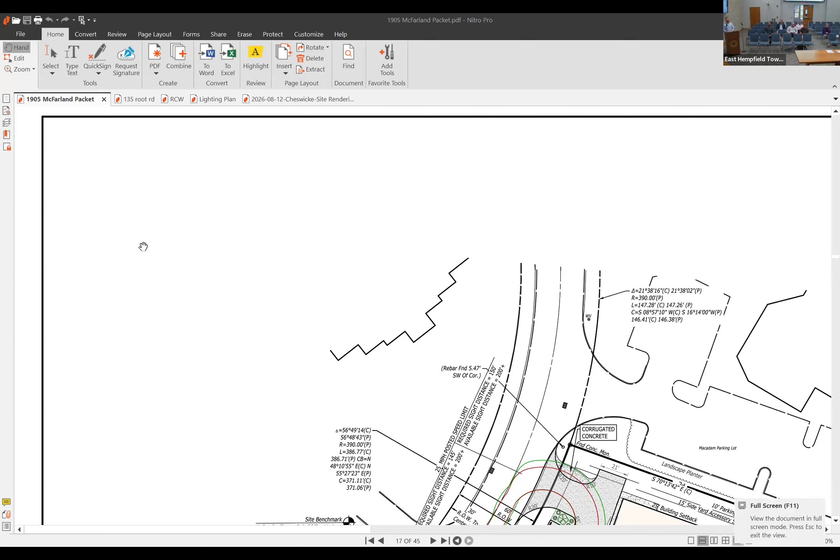Good evening, my name is Chris Monahan. I'm with Mack Engineering, here representing the applicant on 1905 McFarland Drive. The project is on a 6-acre lot just east of here on McFarland Drive. It's within the Enterprise Zoning District and has a Greenway Overlay District as well. The plan, it's a final plan, proposes construction of almost a 62,000 square foot facility to be used as general industrial. The lot's serviced by public sewer and water.

We did receive capacity approval letters last month from both of those authorities, so we're in a good stance there. We have gone through 3 reviews with DMA so far, and the last review that we got last week is fairly straightforward. Most, if not all, the items we will comply with.

A few of the major items left is the NPDES permit. We've reached administrative completeness on that, and we're still waiting on our technical review comments from the Conservation District. The other item is the traffic impact study. The applicant is contracted with TPD to get that completed.

So with that, we do have a handful of waivers and modifications we would like to request in this project. If you'd like, I can run through those right now. Yes, typically we would like you to go through them one at a time, and if any of us have questions, we'll ask them before you move to the next one.

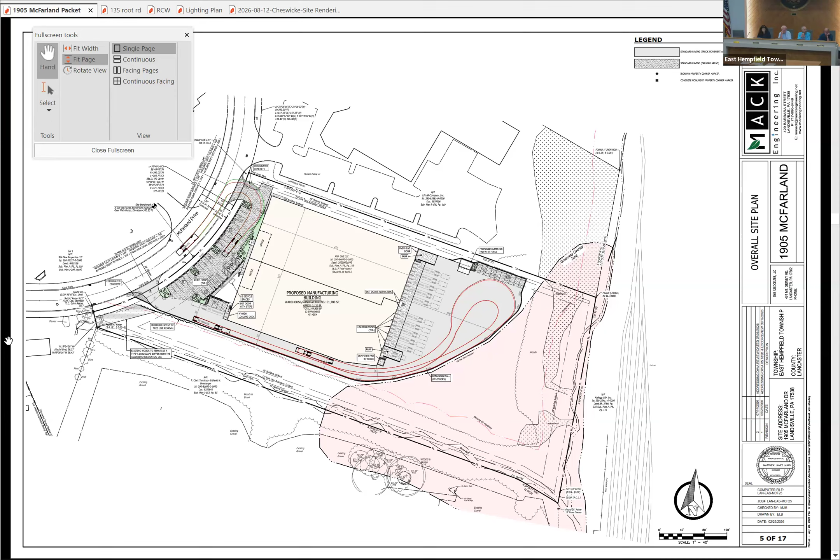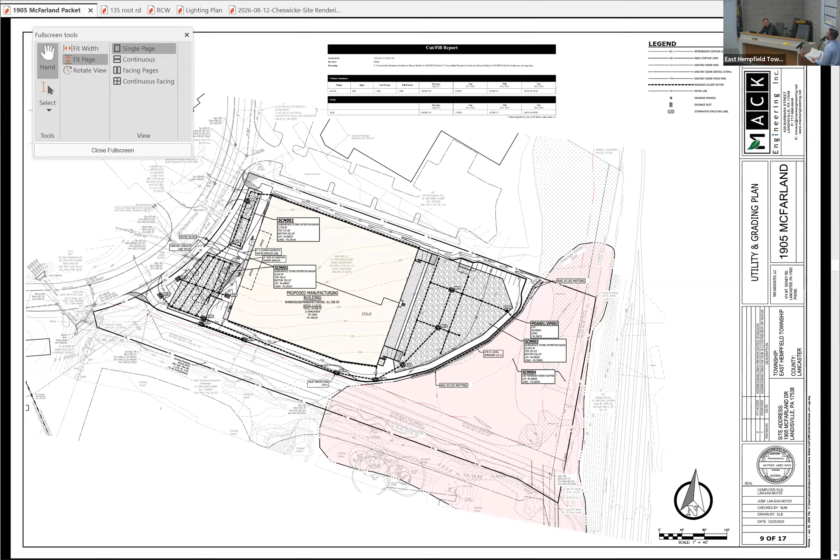Could we pull that up to the right plot plan here? You can see the... take it a moment to catch up. What page is he on? That's the correct sheet, jump to it. Don't look like it, that's the front of the building. Page Josh, 21. 21.

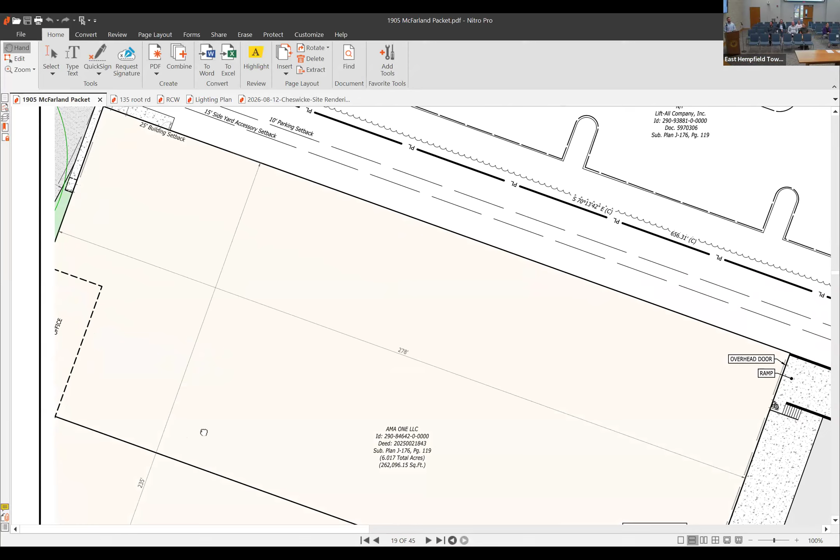No, we're fairly, I mean, we don't want to have the trench any closer to the building than it is. But I do see your concern over the landscaping, and the inlets on top of the sewers probably can't happen either.

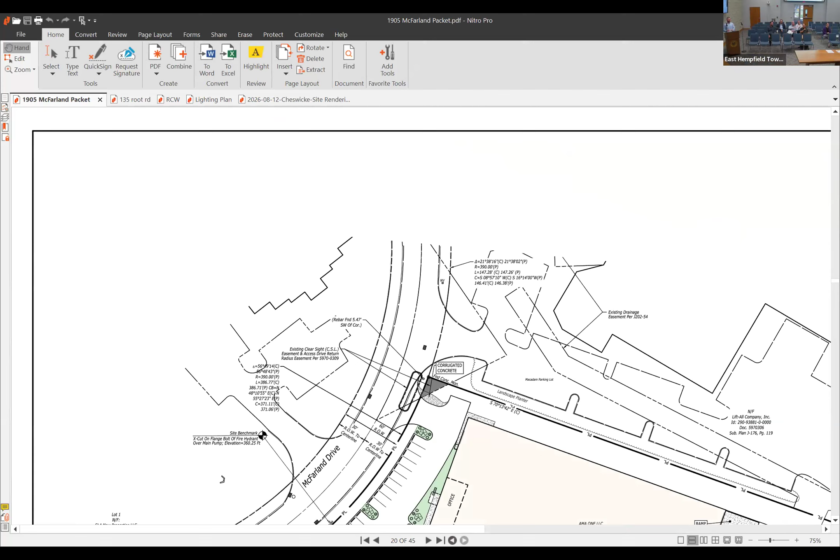Well, we can revisit that with LASA and see what they would allow, and if it constitutes a waiver request. If we can't meet the interior landscape requirement, we'll probably have to return and request a waiver for that. Okay, thank you for the comments there.

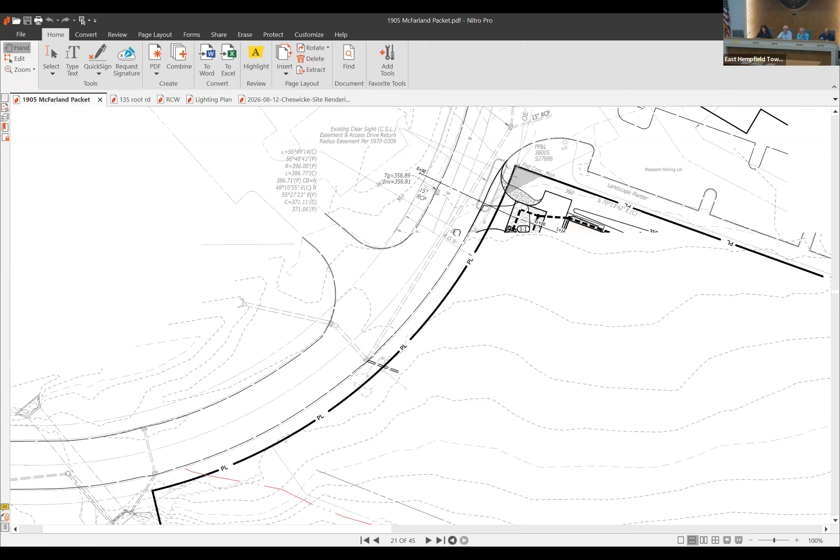Is there anything else on that one? Okay, the next one is just the minimum 150-foot driveway separation, just due to the layout of the existing cul-de-sac, McFarland Drive, and the existing businesses and residents around there. We physically can't meet the turning radius requirement and the 150-foot driveway separation, so we're asking for a modification for that one.

Scott's there, make sure I didn't jump ahead. Oh no, we're good, number six. Number six, yep. So we're requesting a modification to 85 feet, 94 feet, 135 feet instead of the 150 feet. No questions on that one.

The next one was the deferment, so just deferring the roadway widening, sidewalk, curb, and grass strip. We're happy to do that if the Board of Supervisors with the township ultimately requires that in the future, but right now we'd like to defer it.

Just a question again about how this compares to neighboring sites. There's a comment in here that says currently McFarland Drive is classified as a local road, which requires a 50-foot right-of-way, 26-foot cartway. The applicant has made a request that McFarland be classified as a collector road, which requires a 60-foot right-of-way, 30-foot cartway, and so forth.

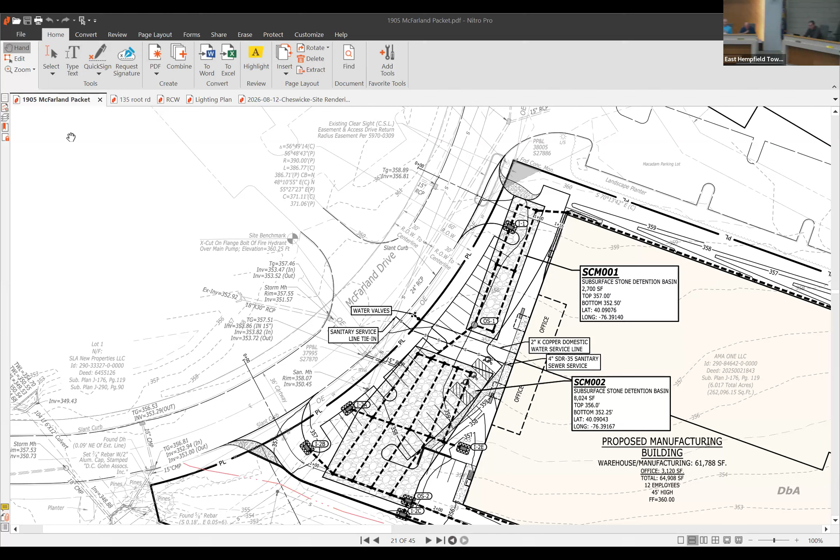Um, next one is 135 Root Road. Oh, okay, you're not sitting down, huh? Yep, so would you like me to start? Sorry, I didn't mean to jump ahead on you. Go ahead, no please. We're just gonna pull up the plan, but go ahead.

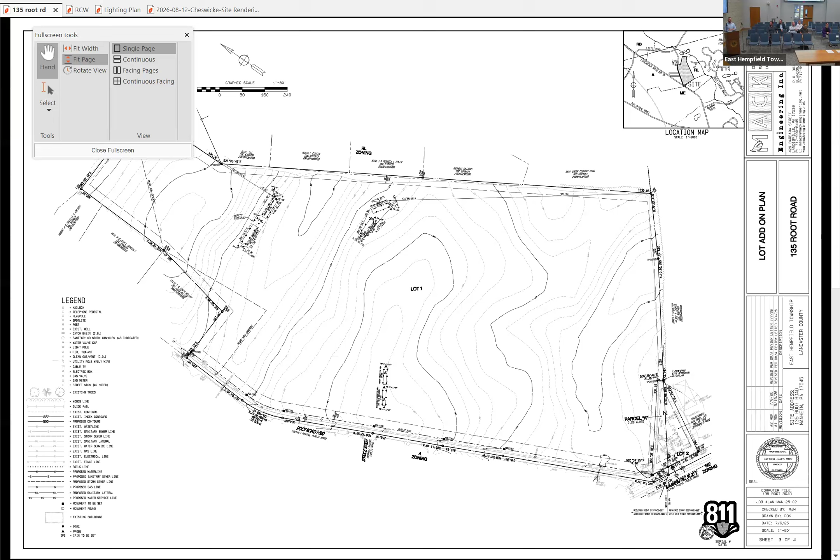Yep, the next one is just a minor plan. It's adjusting a lot line between two existing lots. There's no development, no earth disturbance, no change of use or anything. The larger plot that you see up there is a vacant lot that's just used for agriculture right now. The one in the bottom right corner of that sheet is an existing lot. It's got some encroachment on this larger lot, and that's ultimately why we're here tonight to request approval or recommendation of approval on this plan.

It lies within the agricultural zoning district. We've gone through 3 reviews so far with DMA, and the comments are very minor. Really nothing else to address on the plan itself. We do request one waiver on this one, and it's just to show the plan scale. We believe that this plan scale really represents everything for what we're trying to accomplish for this plan. And I believe Scott recommended approval on that one, recommended be granted.

There were a total of 4 modifications, a couple more waivers on here that I forgot. The other one is, would you like me to jump in the waivers? Please. The second waiver is the same one we mentioned before about the survey.

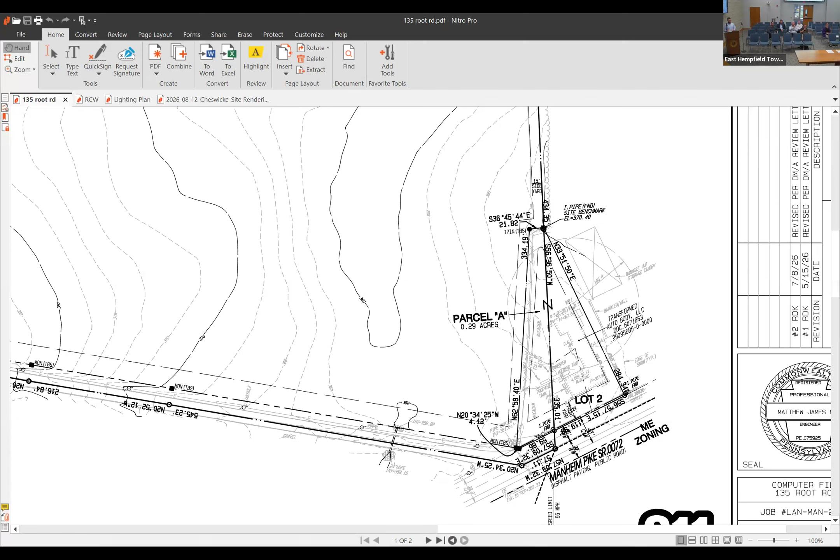We provided aerial imagery, and that seemed to satisfy Scott's comment on that one. It's included, it's the 4th sheet in the plan. I think it's the 4th sheet or the 2nd sheet. Yeah.

Third waiver is the frontage improvements. Yes, we created a deferral exhibit, and Scott appeared to review that and recommended that would be granted as well. So there's 2 exhibits that we prepared, one for along Root Road and then one for along Manheim Pike. One is a PennDOT road, so that'll be subject to PennDOT approval when it comes time to make those improvements. And then Root Road is another one that we're deferring.

So three waiver requests, or 2 waiver requests and 1 deferral, and a subdivision worth mentioning. We'll comply. Last one, number 4, just proving that there's a visible house or street address number on the facility, and we've provided that to Scott. It just didn't make it in the letter. Okay, so that's all I have for that one. Happy to answer questions you may have.

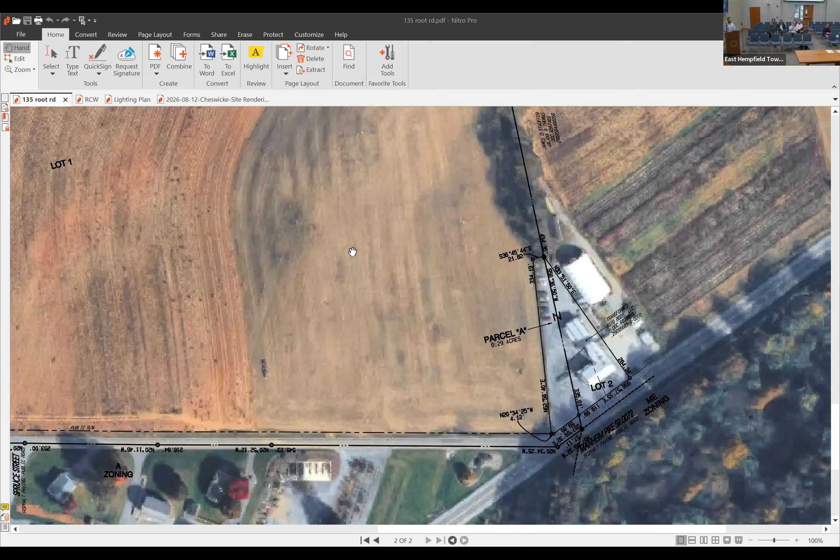Did you cover the wetlands report? Oh yes, Scott reviewed that, and we just had to have somebody sign it. Wayne Bowen in our office, he's done those for us and he signed it, and I'll provide that in the next submission. Thank you.

Does anybody in the audience have any input on this plan? No one on Zoom. Okay, then we're ready to move on with the waivers and modifications.

Mr. Chairman, I'll make a motion to recommend approval of requests 1 and 2 and conditional approval of 3 and 4 for the 135 Root Road Lot Add-on Plan, Township File 2608.01, subject to staff and engineering comments. Second.

Okay, we have a motion by Mr. Boltby, seconded by Mrs. Reidenbaugh, that we recommend approval of modification requests number 1 and 2 and conditional approval of modification requests 3 and 4 for the 135 Root Road Lot add-on plan, subject to staff and engineer comments. All those in favor signify by saying aye. Aye. All those opposed? Okay, that would be unanimous.

And then the plan itself, we need a motion. Mr. Chairman, I'll make a motion to recommend approval of the 135 Root Road Lot Add-on Plan, subject to staff and engineering comments. I'll second that.

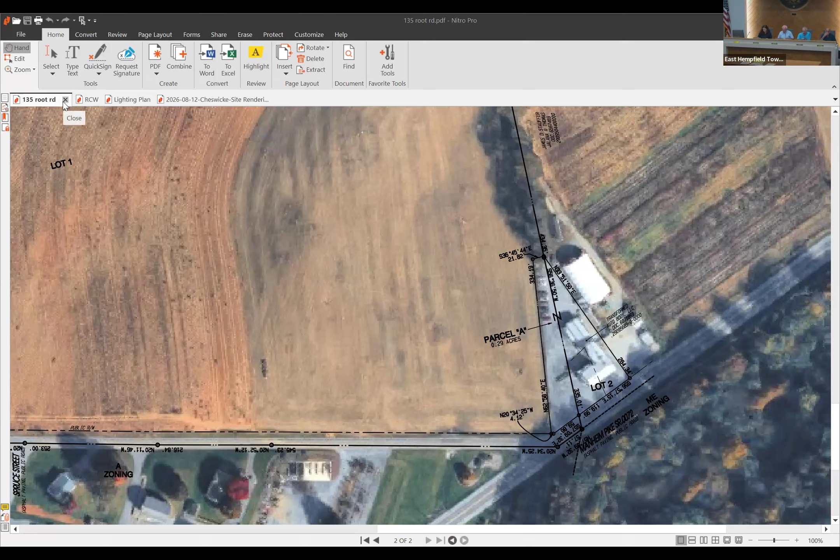All right, number 3 is RCW Racket Club West Athletic Club final plan. Good evening, Amanda Groff with Harbor Engineering here on behalf of RCW Athletic Club. We were before you back in, I believe it was January, for the sketch plan, granted the waiver of preliminary. A little bit of background as well, this property was rezoned back in October of 2025, and it's now in the Enterprise Zoning District. It's a 6.5 acre property, currently has indoor and outdoor tennis courts as well as a padel court.

We're proposing a building addition for some indoor pickleball courts, as well as reconfiguring a portion of the access drive and adding some more parking. The property does have public water and sewer. We did recently get the capacity approvals from both LASA and City Water.

Those are still noted in the DMA letter, but make sure that's passed, or we sent that along to them today, I believe. We do have 2 subsurface infiltration beds proposed underneath the access drive and the parking area to handle the stormwater. The NPDES permit is in progress. We're still waiting on that approval from the Conservation District, as well as a general permit for a pipe that we're relocating, so we're waiting on DEP for that.

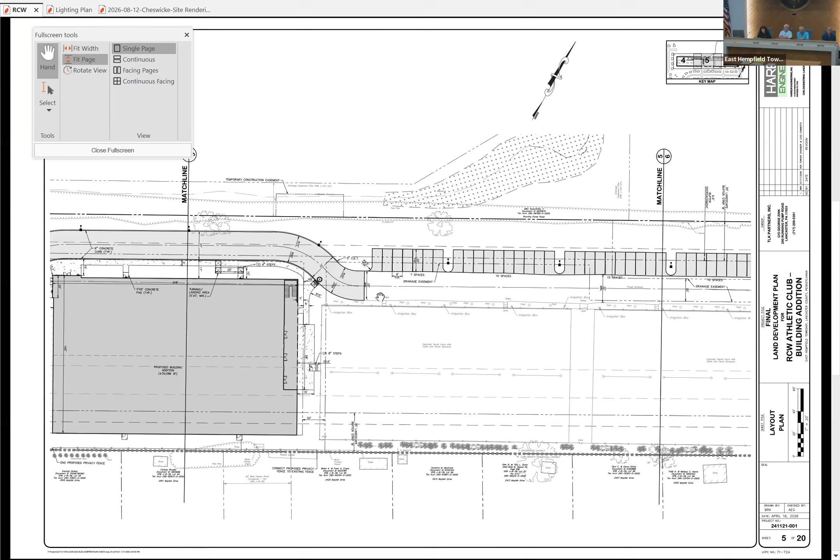Could you zoom in on one of those islands, Nate, and explain those interferences you just talked about? Because the island is, what, 20 feet or 18 feet deep for a car? Give me one minute, I'll pull up your plan set. I think I only pulled 5, 6, and 7.

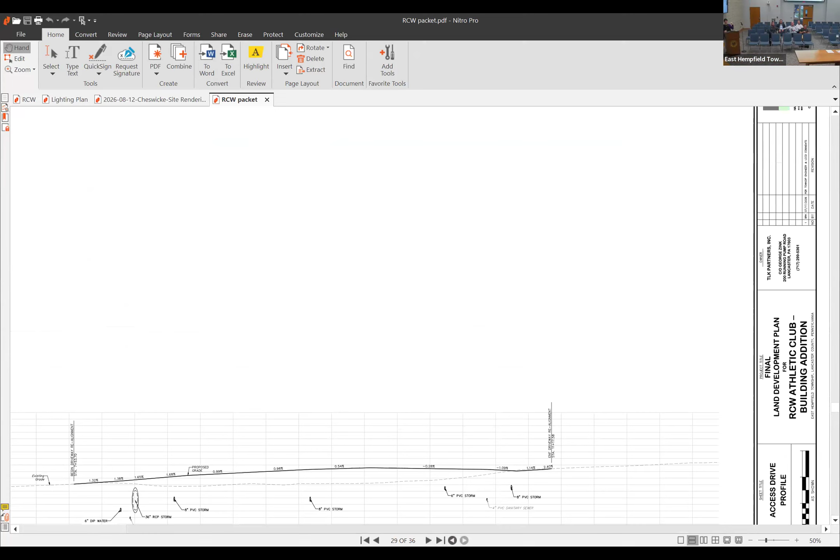While he's doing that, yeah, the island is 20 feet, that's what the parking spaces are. The sewer line kind of goes through the middle. The water line is now 5 feet from the sewer, so it's at the very bottom. It looked like there were basically two or three lines there, and I was curious what they were. Right, so it's water, then sewer, then the light, and then the infiltration bed.

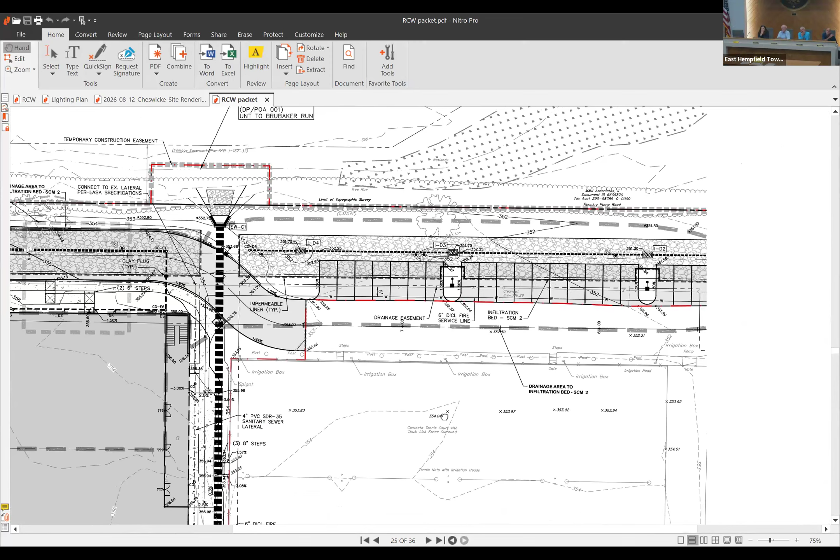Wow. While this is all getting pulled up, one question that immediately came to me related to this specific waiver is looking at the access drive and the side that the parking was placed on. Why was the parking chosen on the opposite side of where all the pedestrians are going? Meaning, if you put the access drive where the parking is and the parking where the access drive is, all the pedestrians wouldn't have to cross the access drive?

And would you be able to plant in the planting strips then, because the trench wouldn't be underneath it? Right now we're creating a scenario where everybody that parks has to walk across the access drive to get where they're going. If you flip the parking to the other side, all the pedestrians stay off the access drive, the islands are on the opposite side of the trench, and trees can be planted in the islands.

I think it was originally done that way because the access drive is existing, so we were trying to maintain as much of the existing access drive as possible without having to disturb that entire length and then have to do additional stormwater because of disturbing that area.

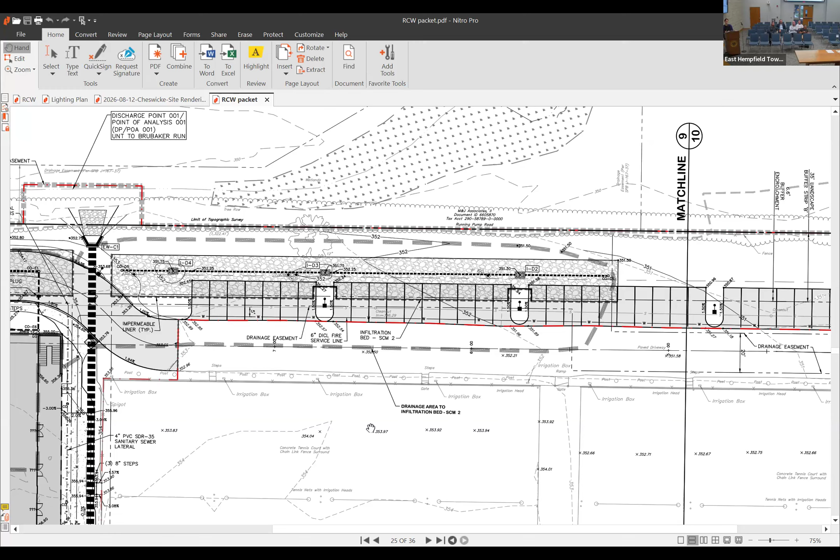Is there also existing parking there too? Not in that area, so all of the parking is on the west side by the existing building. There's a portion that's gravel right now, kind of in the middle, and then basically where we're adding parking now, they park on some of that as grass currently.

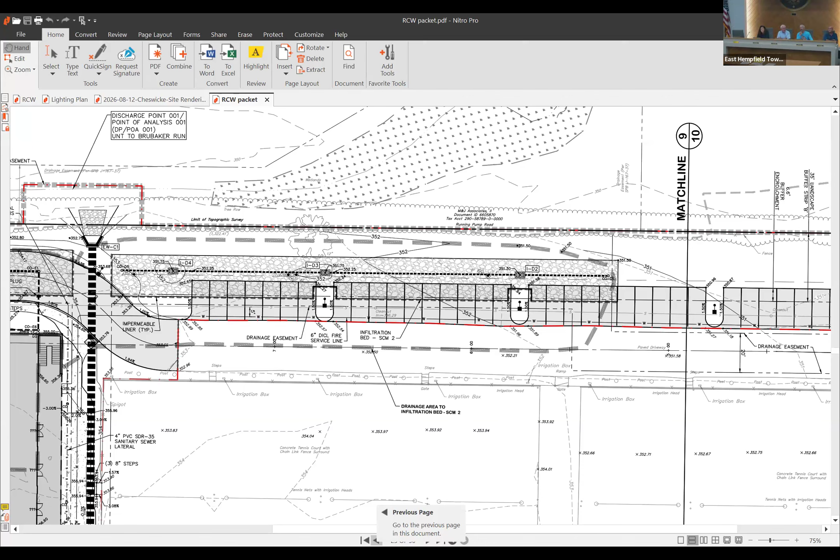I think Josh has a good point there. I mean, you've got it macadamed already, so you maybe have to dig up a little bit to put islands in, but the driveway or the access road would just become parking. And then put in the access road where the parking is now.

Not necessarily reconstruct it, you're saying just basically carve out the area. Yeah, I don't know from a civil engineering standpoint whether you have to reconstruct it, but if it's good enough for an access way, it's probably good enough to park. You just cut some notches out for your islands and plant trees. Literally, I think take that and fold it up.

At the end of the day, I think the only thing you're requesting that really gives us any leverage to say you're not following the ordinance is the planting in the islands. Otherwise, the plan's fine. But at the end of the day, I look at it and say we're putting all the pedestrians on the opposite side of where the traffic's gonna go. People are gonna be crossing that nonstop - kids - for everybody that comes in, and it just seems like you can make such a safer environment. People pull in, get out of their car, walk to where they're going, not cross the access drive.

But is it a deal breaker to me? No. Is a tree in an island the end of the world? No, it's pretty secluded back there. I mean, I drive past this every day.

I live on this road. So I do know there is significant traffic that comes out this access drive at certain times when everybody's leaving, turning left and going to the stop sign. They have to wait there in that access drive in order to get out. At 5 o'clock hour, it happens a lot where that backs up on Running Pump Road and people are waiting there. If you add more traffic, do you have stacked parking back through where people are trying to cross? It's not the end of the world, but at the end of the day, it just seems like it could be so much more pedestrian friendly if the parking was on the other side.

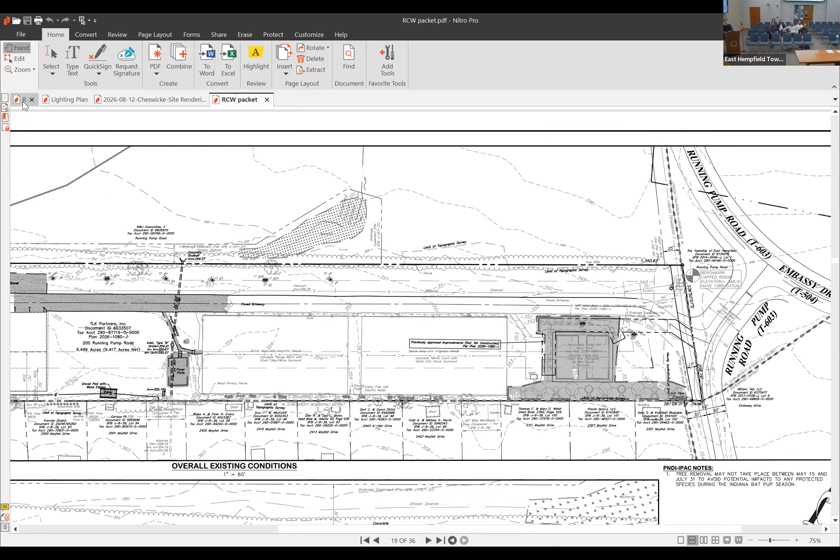So your parking would come about halfway down - halfway to the east? Are those, it's past the padel court, so it comes pretty close to the frontage. It's within about 60 feet of the frontage. There you go. Oh yeah, there we go.

So it would probably be a little tight with the entrance there. You may have to lose one or two parking spaces or reconfigure a little bit to get up there.

I don't know, might have some wiggle room because the padel courts are at least further from the access drive than the tennis courts are. So we might be able to angle it basically from the tennis courts towards Running Pump. That would be kind of a reconfigured area potentially.

Is there a lighting system there now as it exists? So the only lights there now are on the existing building for the little bit of parking on that side. And then the padel courts have lights, but the outdoor tennis courts do not have lights. And the access drive doesn't have any lights currently.

Hey, what's the current status of the timetable on this? I don't see anything about an extension in DMA's letter. I think we sent an extension letter, but I don't remember - I think it was relatively recently that we sent that in. Yeah, because otherwise it would have expired today. It's already expired, yeah. Oh yeah, yesterday.

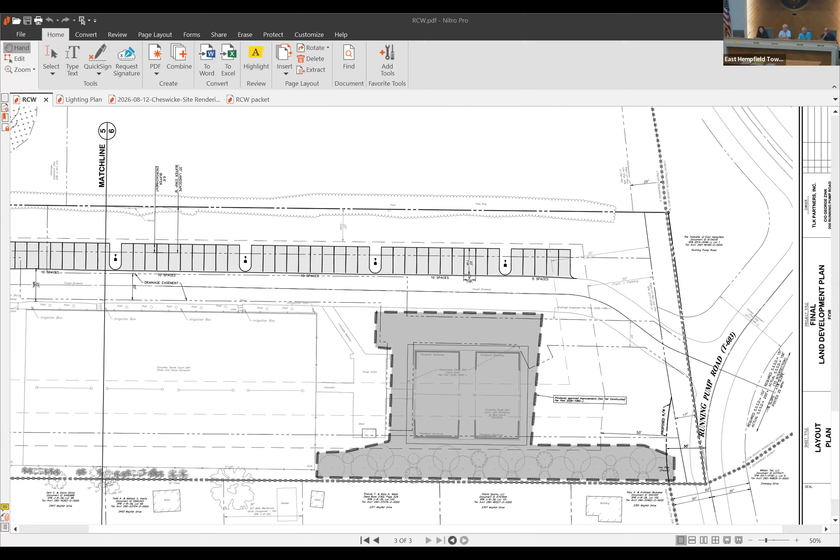I think it was 90 days. I just don't remember when in July we would have sent that over. It might have been right after DMA's letter, which was July 31st. I believe it was sometime in July that we would have sent it in for 90 days, so we have probably till October, November, something like that.

I think this is one opportunity where we could ask you to take a look at it. We could table it tonight, talk about some of the modifications, but I think it's an opportunity for the client and the township to work together and maybe create a better plan.

So I definitely can look into that. The one question I have goes back to the sidewalk waiver we had talked about before. Part of my reasoning was that when the parking's on the north side, it didn't make sense to have sidewalk, and it eats into that landscape buffer. If we swap it, would you want to see the sidewalk south of the parking then, or not necessary?

I guess I want to weigh your thoughts on it. So the sidewalk would be to the south of the parking then. It could be on the north, but it wouldn't make sense on that side either — that would be right down the street, or right down the access drive. No, take a look at it. Okay, let's see what makes sense. Flipping it over gives you more options.

I just wanted to circle back and see your thoughts on that as well. Well, we can avoid making a motion on that one now, and maybe all of them — maybe I'll just table everything. I'm not sure if there's any reason to push for any of these.

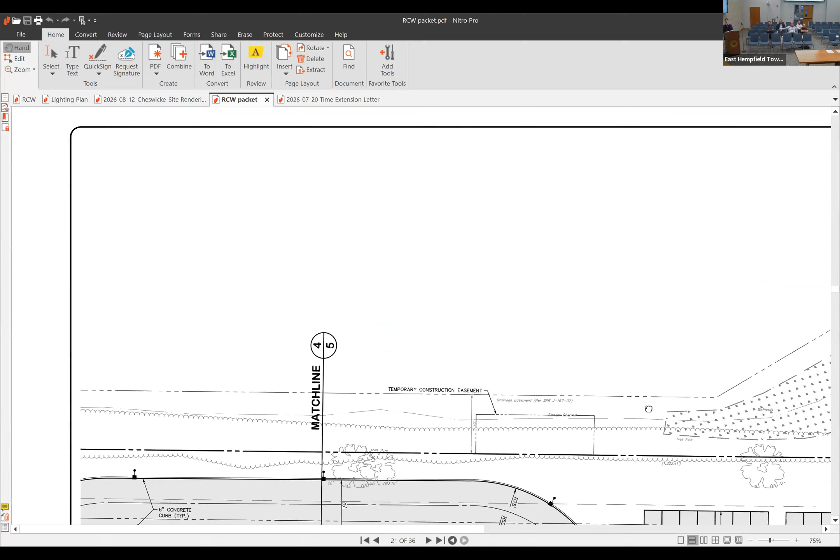Yeah, we have it on here. So yeah, it would just be on the south side there of the access drive, as you can see where it basically follows Running Pump Road. But then north of the access drive, it's not aligned anymore.

Are you okay if I continue? Yeah, I was just checking off which ones we needed to. Sure, so the next ones are stormwater waivers. Number seven is regarding the loading ratios.

We're slightly over the required — we're at 4.3 to 1 impervious for SCM3 instead of 3 to 1 impervious for karst areas. The geologist did support that as well.

The next one, number eight in the DMA letter, is regarding the riparian corridor easement, to not have the 35-foot easement since the stream bank is on the adjacent property to the north there. And that stream is already in an existing drainage easement on the adjacent property.

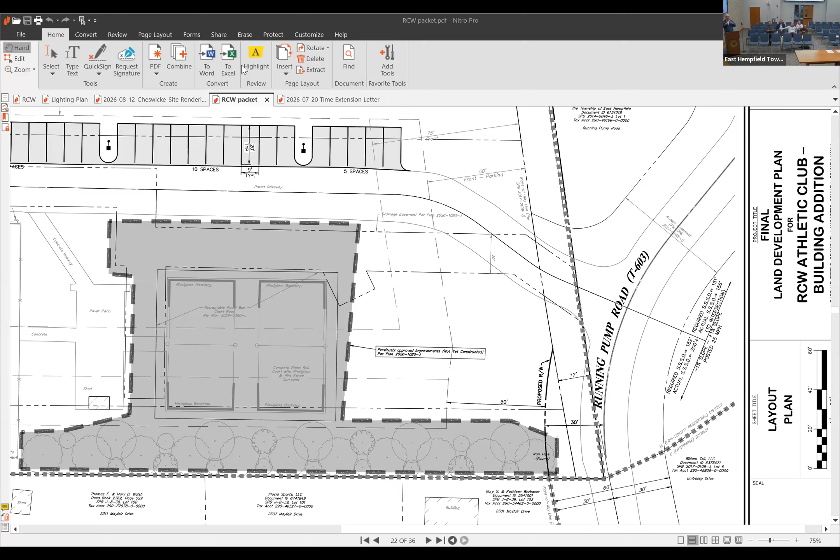I couldn't help but think about the parking when I was sitting back there. So a question about the new building — I would assume you'd still want the players to go into the main building to pay and things like that before they went in to play pickleball? Yeah, okay, what I'm thinking about is just if the cars were right against the building, it really doesn't help that much, because I think you still have to get out of your car, walk down the road, and then go in and pay. You're not going right from your car into the building.

So either way, I think you're walking down that pathway. And then the old tennis courts have the parking on the far side. So I wonder, when you look at it more closely, if it's more safe to have the parking continue on the other side, so it's one long row, as opposed to people getting out of their car and having blind spots while the traffic's going that way. I'm just trying to help you here. It just seemed to me — also the possibility of the car hitting the building. If you're parking right there, someone's going to bump into it someday.

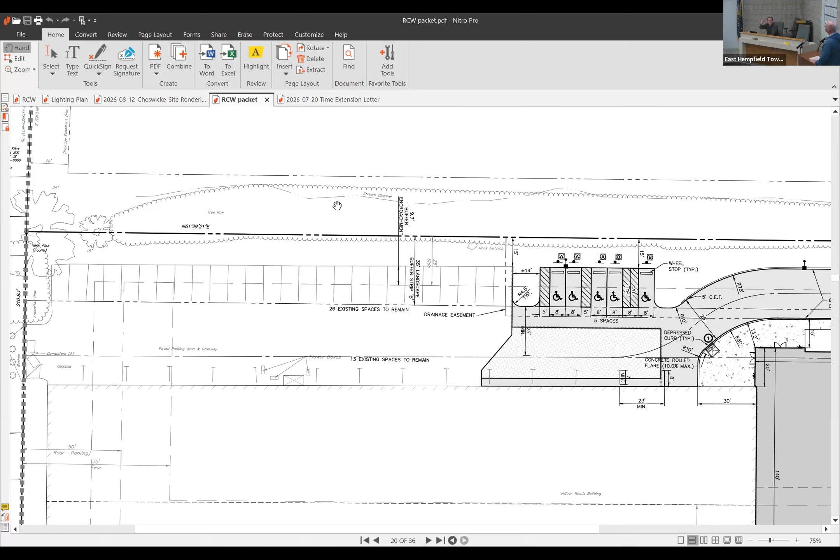So they're trivial points, but I know, Jim, you're looking at me funny. Well, I'm just looking — the new building doesn't have parking in front of it either way. Oh, okay, I thought you were suggesting that. Right now that shows the original building and existing parking except for the handicap spot. Let's get it to go here. The addition doesn't have any parking.

All parking is on either side, either by the existing building or by the outdoor courts. So there was no proposal to put parking against the new building? Nothing. I'm sorry, I didn't have the whole perspective sitting back there. This one is so long that there's only one page that shows the entire property, in 3 sections.

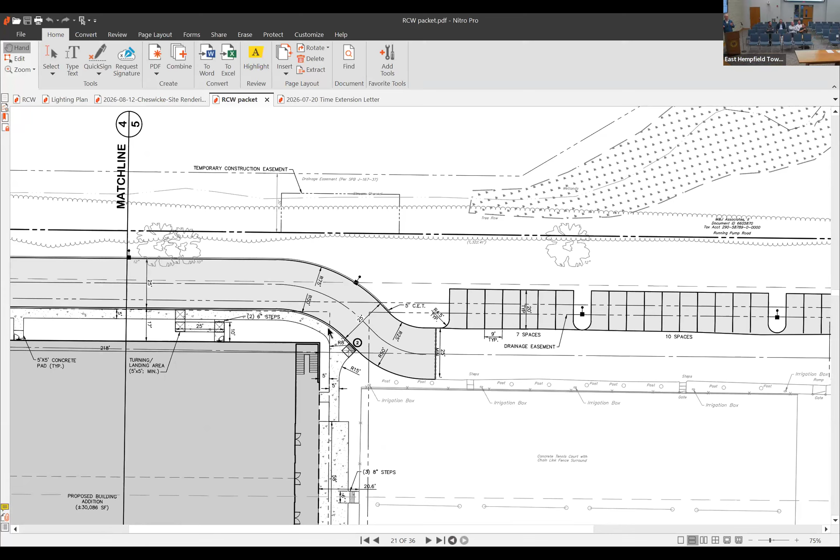Page 22, long and narrow. So where was the spot you were encouraging the parking to be on? Look at the south side of the chart, the right half of that - this is the outdoor courts, all the way down to the access drive. So the pickleball courts are to the right of that plan.

So you would have the parking right next to the pickleball and next to the tennis court. Pickleball, right there.

The padel courts, whatever - we're just talking about the padel courts now. Is that the only place you're proposing parking? No, we're suggesting that all of the gray parking you see at the top should be flipped to the south, next to the outdoor courts and the padel courts, and the access drive should be up towards the north property line. So just flip it up and down.

So then the people watching the tennis would have a car between them and watching it? No, I don't know where they're watching it from. They wouldn't watch it from the access road, I hope.

Maybe everything I said was meaningless, but I was trying to figure it out. And how many pickleball courts are in the new building?

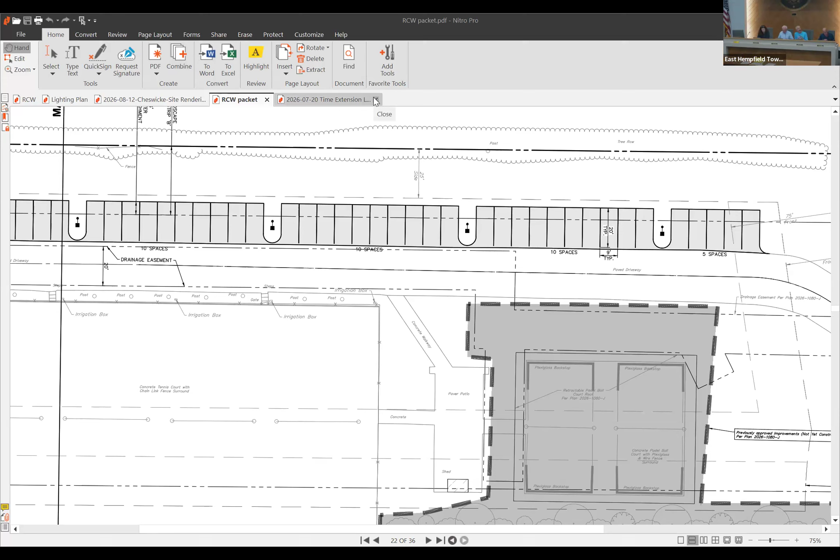All right, fourth agenda item is Cheswicke Town Center. We have a sketch plan.

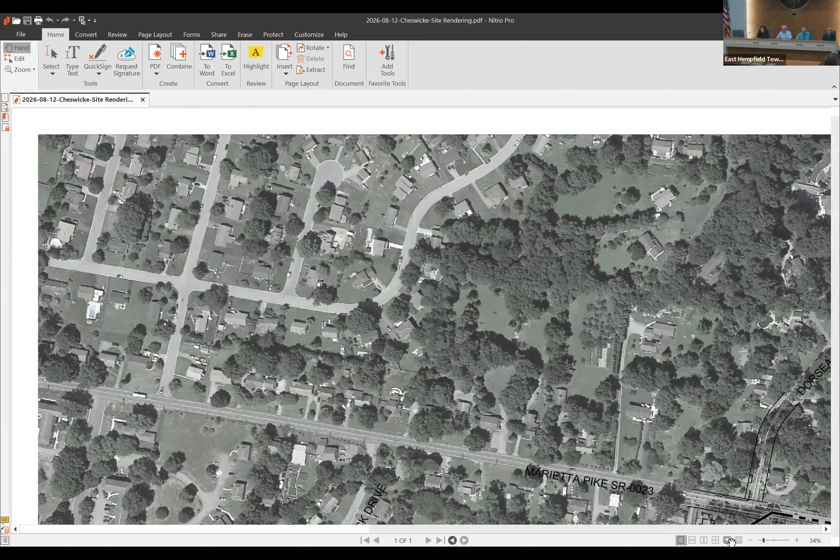When we started to plan to proceed with this, we looked very carefully at your SALDO and saw the invitation to submit a sketch plan, with the possibility that the board could waive preliminary plan and we could go to preliminary final. So that's one reason for this application. The other is to get this plan before you and get your comments. So you see the plan up on the screen. Bill is the principal author of this plan, so I think it'll be more productive if he takes you through the plan and describes what we have in mind.

I have a question for you. You pronounced it Cheswicky. Is that correct, or Cheswick? Okay, I just wanted to clarify, because I've always been calling it Cheswick since 15 years ago. I just want to make sure somebody wasn't mispronouncing it. Someone said to me when I started to practice law, number one rule: learn the name of your client and how to spell it. Right, you got half of it right. Anyway, come on Bill.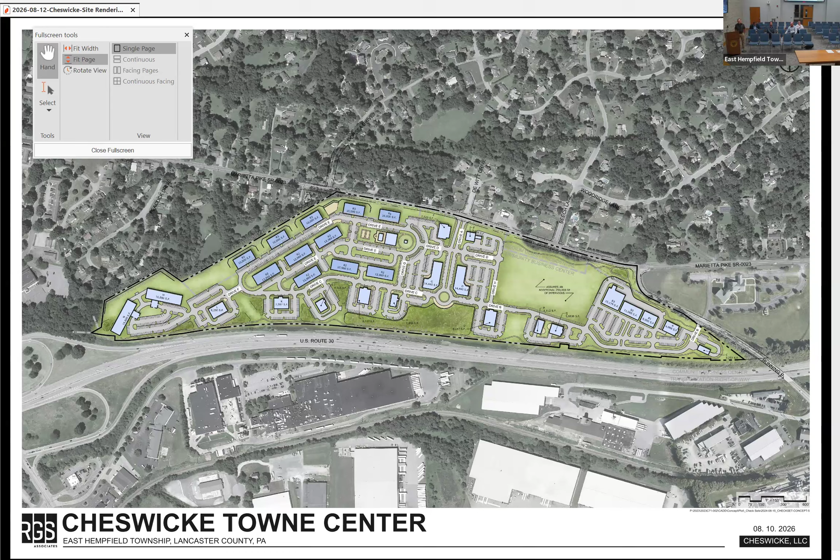We have laid them out in a fashion that's almost identical to the plans that were used for the discussions 15 or 20 years ago. And the comments were that, oh, well, you've got this little strip of 130 feet, you get X number of units from that, that's all you can put in that part of the property. Well, it makes no sense.

This is one overall development, intended to be one overall development. So we have laid this out, taking the entire 236, and we have laid it out in the best fashion that we can. There is no requirement in the ordinance that in a situation that's split zone, that we have to put the same number of units in this strip or in that strip.

I'm going to ask Joel Snyder from RGS to make the observation that Joel made to us the other day when we were going through this.

Joel Snyder with RGS Associates: just as we've been talking about this site, when you look at the RM zone and how it's been placed on the property, and when you look back to the plans that were used as exhibits when it was being rezoned, I think the intent was clear that from a planning perspective, as Mark said earlier, it was just to make sure that there was residential against residential. But the RM zone boundary that's been placed there has been done in such a manner that you couldn't develop it on its own—you couldn't just subdivide off that RM zone and develop that piece. It has to be developed as part of the overall plan, as this plan is suggesting.